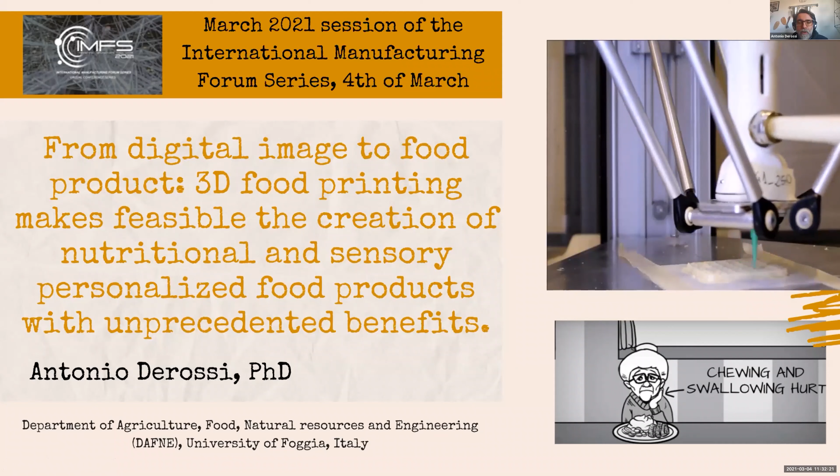For instance, we can see here a classical figure where we can imagine the problem of elderly people. Probably there is a microphone open, sorry. For elderly people, there are a lot of problems with mastication and swallowing. Our question will also be whether it's possible to create something with soft material really able to mitigate this problem.

In general, today my most important points are three: in general, 3D food printing's main characteristics and ambition potential; where we are in terms of the global scenario of our research; and in the last point, I want to share with you some specific results that we obtained in our lab on this topic.

As you well know, additive manufacturing in general, not specifically for food, has three main properties, three main ambitions: digitalization, the possibility to create items from a CAD model, from a digital model.

Decentralization of manufacturing: maybe we are able to create a transition from manufacturing in big firms to directly at home, and also customized product. So it is possible to create structures that meet specific unique requirements for each person.

But when we skip from additive manufacturing in general, we reached really unprecedented success. For instance, I want to show you this paper from MIT, Steven Keating, who with different types of material is able to create very amazing 3D printed structures that are really useful for diagnostic or pre-surgical planning, starting from microtomographic images. So, but what about food?

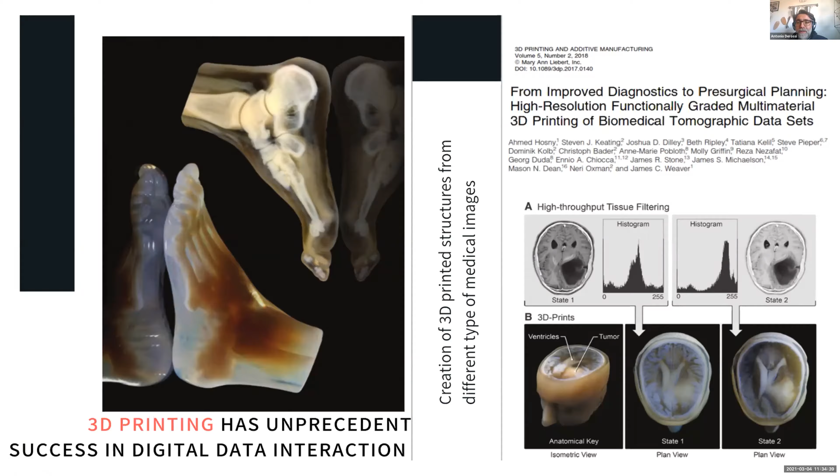In terms of food, the ambitions are more or less the same: the possibility to create new services, new companies, new products, the possibility to create tailored food products, and also the possibility to reduce food waste. One of the most important things is that if in the future we are able to have a 3D printer at home, maybe we'll be able to print just the amount that we want to eat, and not more. Wasting food at home is a very important challenge in these recent years.

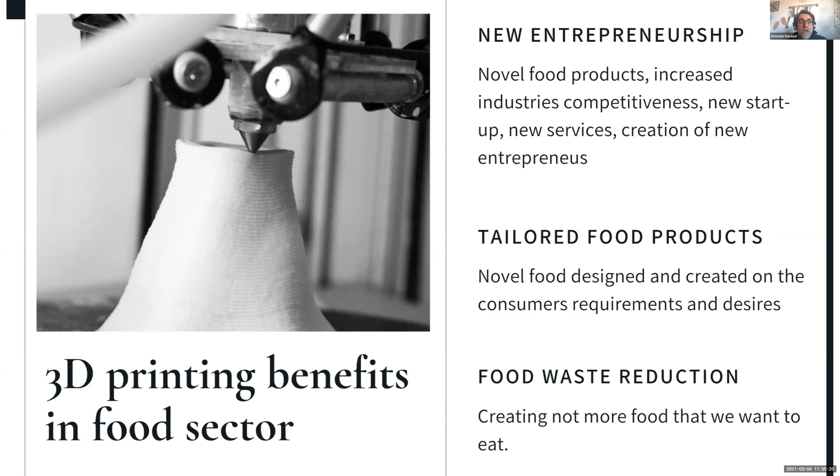But for now, these are used just for specific events. In terms of visual aspect, we are really close to obtaining personalized shape and personalized dimension.

So for 3D food printing, the main steps are: we have to plan the desired food, we have to create a digital model, we have to create a printable food formula - which is not easy to obtain, because as Professor Hashimoto before me clearly explained, it is very hard to obtain specific shear thinning behavior. And it is not easy, for instance, to create a multi-layer material, 10 or 15 layers, while avoiding any possibility of creating a defect in the structure.

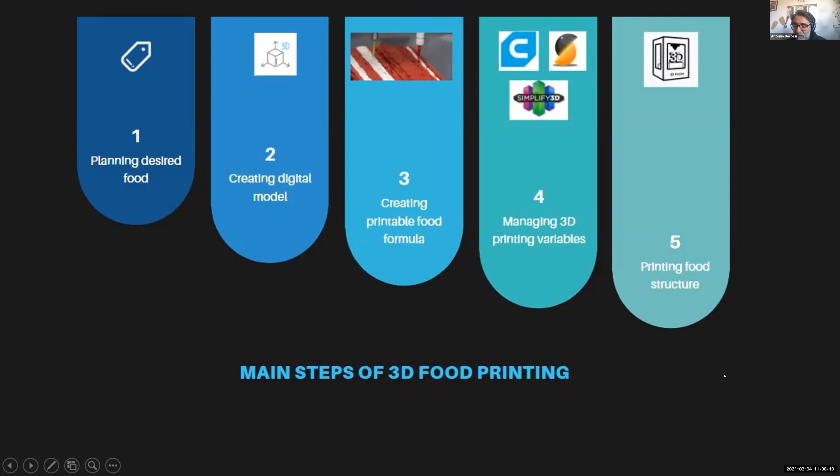PLA, a thermoplastic material, shows a very specific constant rheological property, unlike food. When I want to prepare in the lab, for instance, a printable dough, it is not easy to obtain a rheological property that is fixed every day. So it is not easy to manage printing variables. And then we have to print, and then we have to analyze the printability and the fidelity of printing.

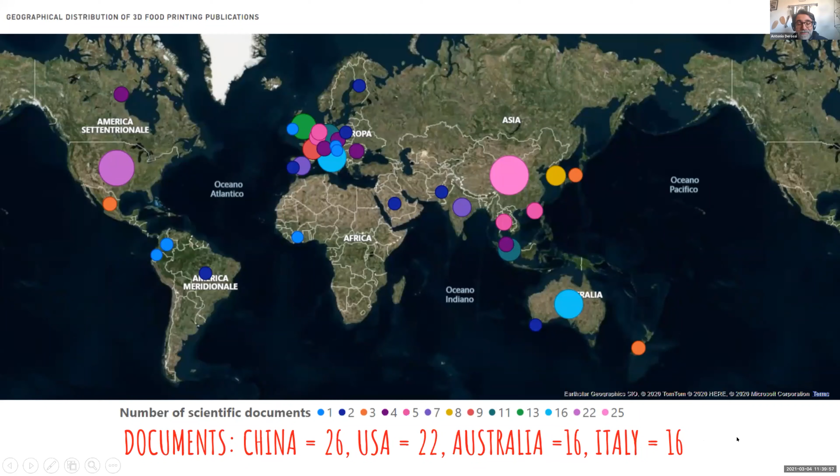So we are in the first steps of 3D food printing, and we need many more years of scientific production to reach the quality of additive manufacturing in general. When we create a geographical map, the most important countries are China, Australia - although in Italy we have more or less 16 papers, these are the most important countries until now that are focusing on 3D printing.

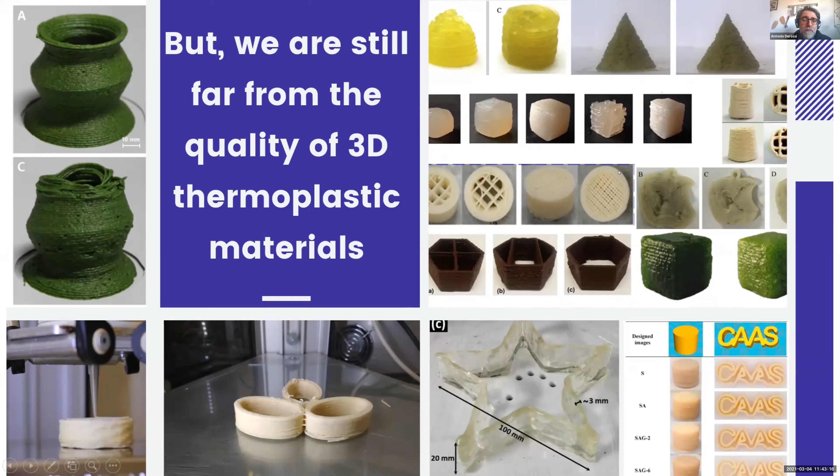These are in general some specific examples, and probably the most important thing is that in 3D food printing, the shapes are more or less simple shapes. We don't really have complex structures that have been printed in comparison to thermoplastic material. In general, the researchers printed easy shapes and easy structures.

But we have to add a lot of information on this point. For instance, we don't have information on the possibility to print at high resolution, lower than 0.6 millimeter nozzle. In general, the majority of publications report a nozzle diameter of 1 millimeter, 1.2, or 0.8. But what about the possibility to create a very thin filament?

We know little in terms of shelf life. It's correct, as the previous colleague, sorry I can't remember the name of the lady, the professor who posed this question, asked: what happens after 3D printing? What about the safety? What about the shelf life?

It's easy to imagine when we print a biscuit that we have to cook, we have to reduce water activity lower than 0.4, 0.5. But what about the possibility to print a mix of vegetable and fruit? We know very little about creating nutritional and sensory customized food products. These are also some very popular examples that I took from different publications.

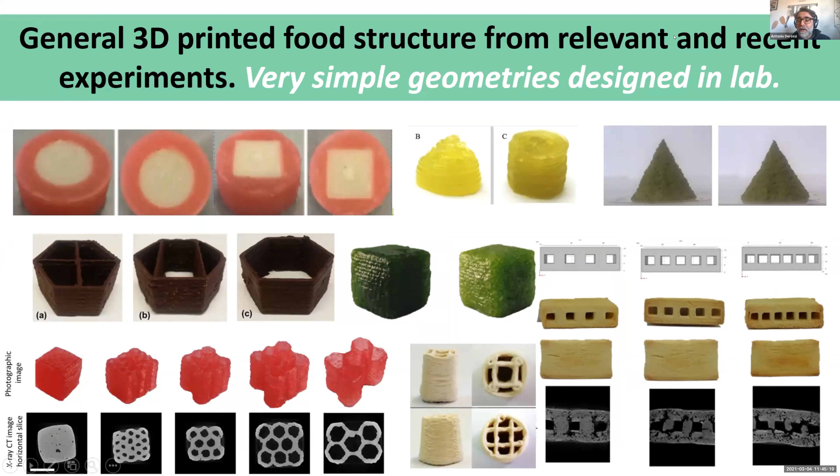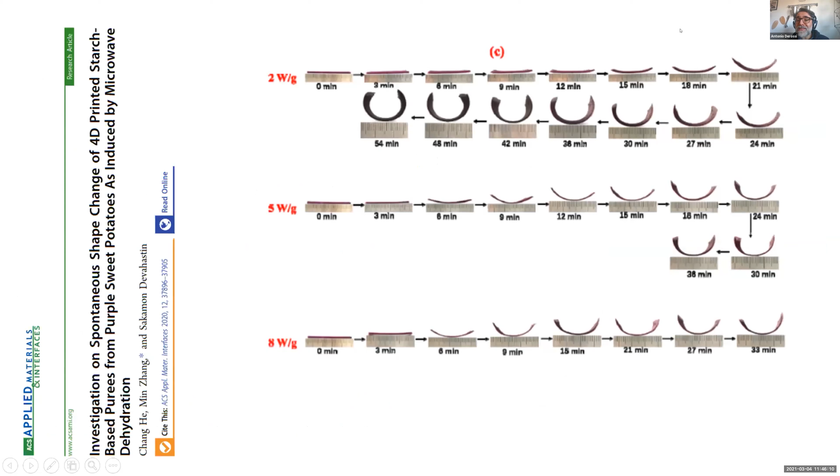Another really interesting point I want to mention was obtained by Parinya. Parinya is a professor in Osaka, and this application is in collaboration with the Massachusetts Institute of Technology. Really interesting in terms of personalization, because I want to show you this short video.

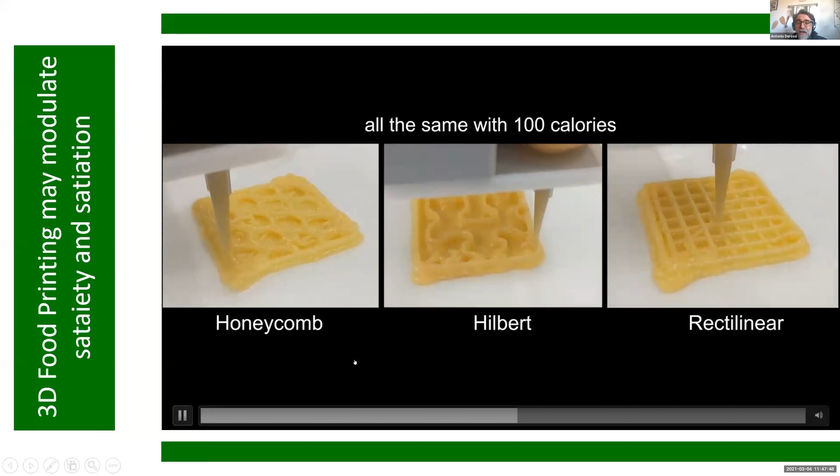If we are able... sorry, okay, what is the main idea? The main idea is that if we are able to program the internal structure, we are also able to create different mastication movements, and this will be able to increase the perception of satiety. So if we are able to plan this, maybe we can help with the daily diet.

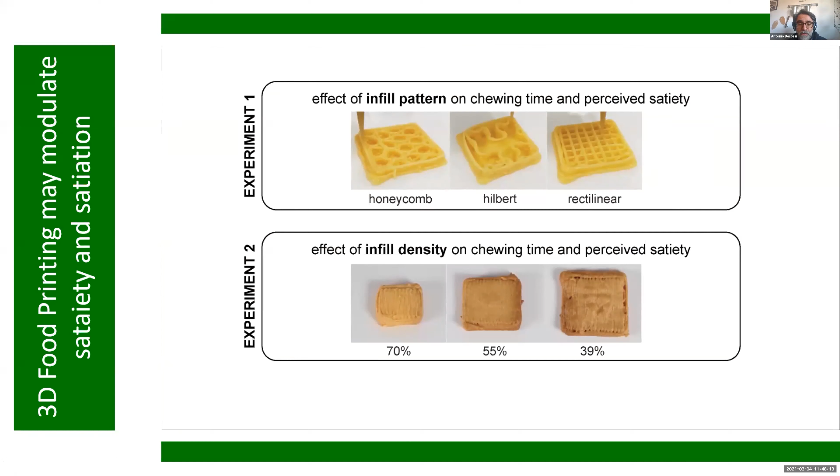It's really interesting because, going back again here, from a specific planning of internal structure, maybe we will be able to induce and create different satiety and satiation perception.

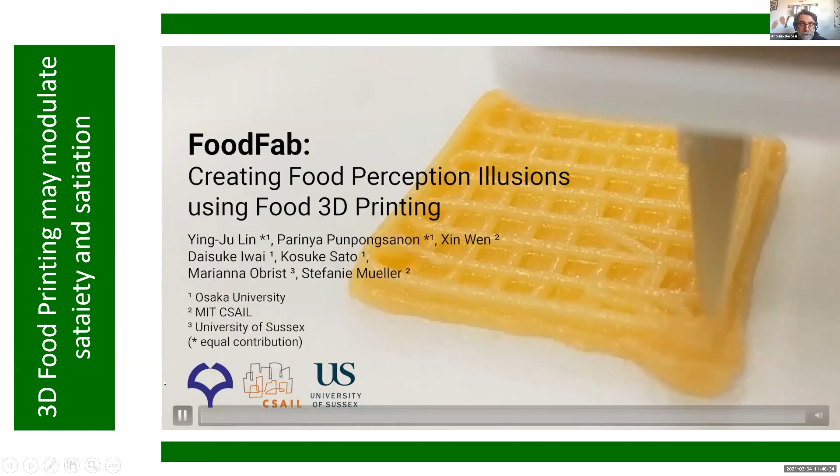Okay, so what about our main progress in this point of view on this specific topic, both in terms of nutritional and sensory property? And what about our main strategy? Our main strategy is...

To think about 3D printing as an assembling property, not a disassembling property. In general, or to use different words, it is an engineering point of view, so we are able to get programmable, customizable nutritional and sensory properties. How do we obtain programmable texture, for instance, or programmable nutritional content?

I want to show you 3 or 4 examples that we worked on in our lab. The first one is this paper. The first idea was: maybe we can plan different CAD models, introducing an increased number of pores inside. This is porosity 18, 22.5, 27, or 2 layers of the same pore with the same dimension.

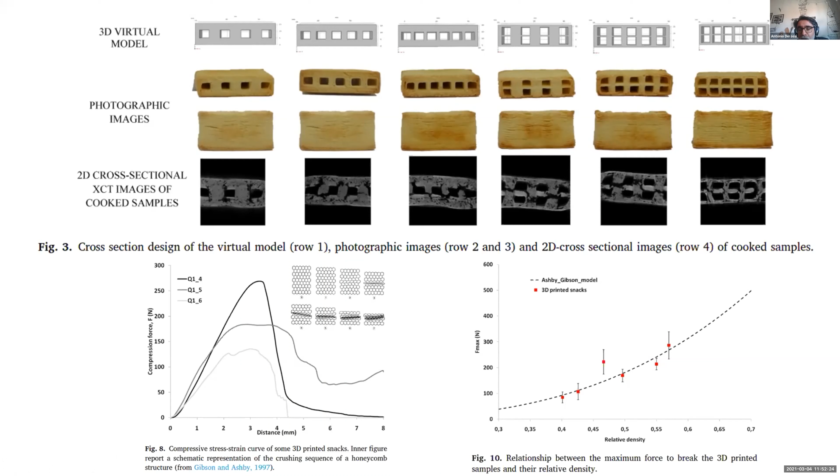This is a second example, based on a different question. We can explore 3D printing to create novel texture properties inspired by plant tissue structure. So it is a point of view like biomimicking, very important for different fields, probably not just food research.

What we did is shown schematically here. From the original tissue, we acquired the microtomographic image, and from this voxel data we extracted just one slice, 512 pixels. Then we rescaled from millimeter to centimeter, and this structure was used to create an STL file. This STL file was used to obtain different models: 2 layer, 4 layer, 6 layer, like crackers with different thickness.

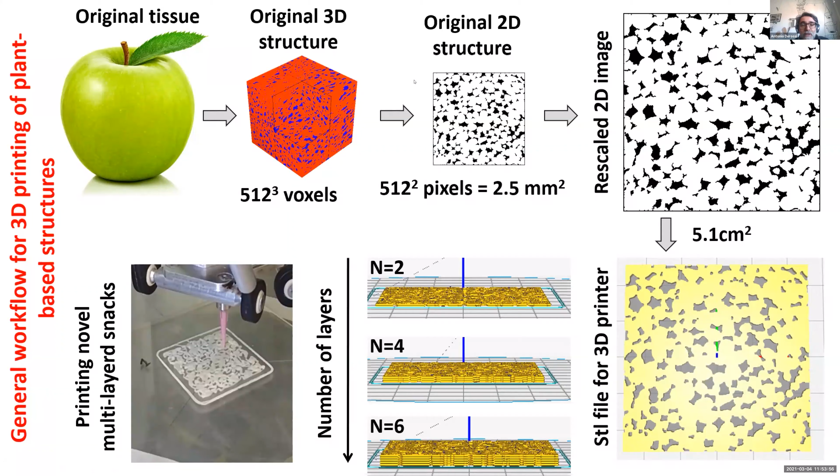And then we started to print to create something new. The second question is whether we will also be able to predict texture. These, in general, are the analyses we performed: microtomographic imaging, texture characterization with a 3-point bend test, and we also used the popular finite element method to simulate stress distribution on the different snacks.

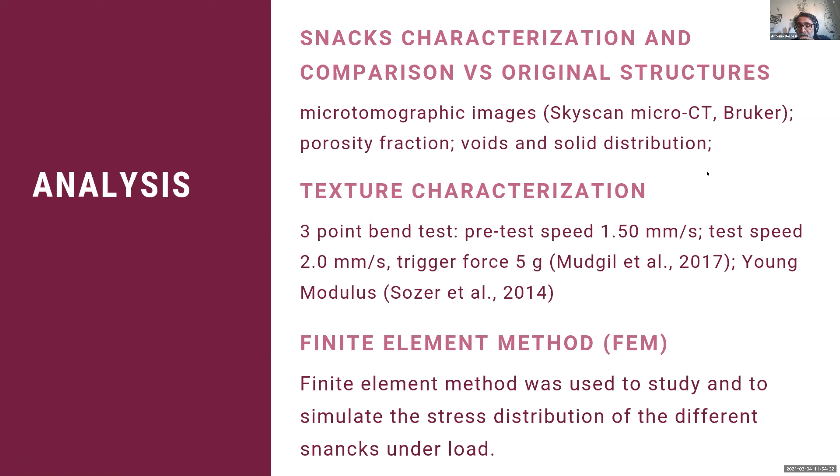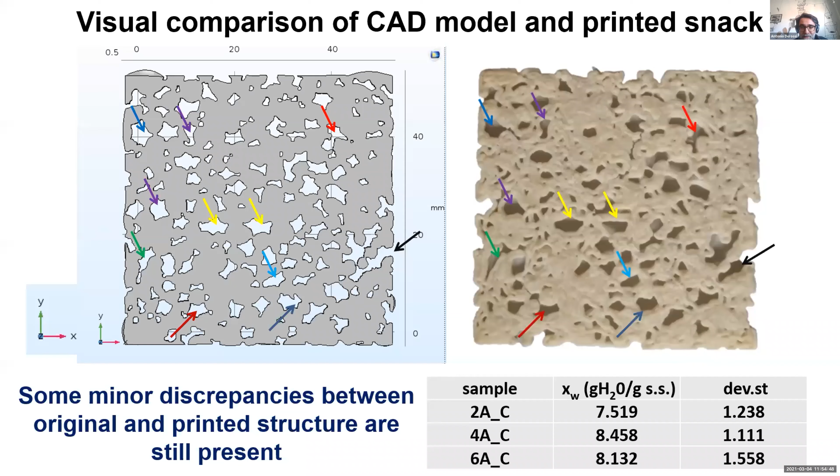Then after cooking in the oven at 180 degrees, obviously we obtained a really impressive increase in porosity, because during cooking in an ordinary oven and during dehydration, what we obtain is the formation, the creation of different new pores and new fractures.

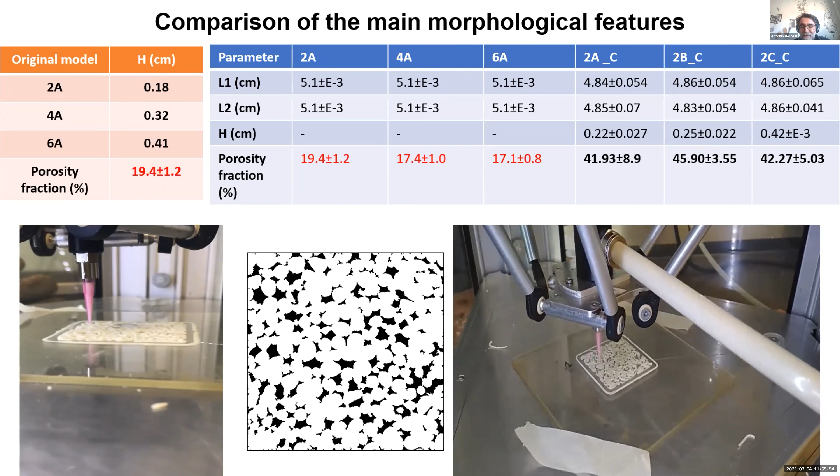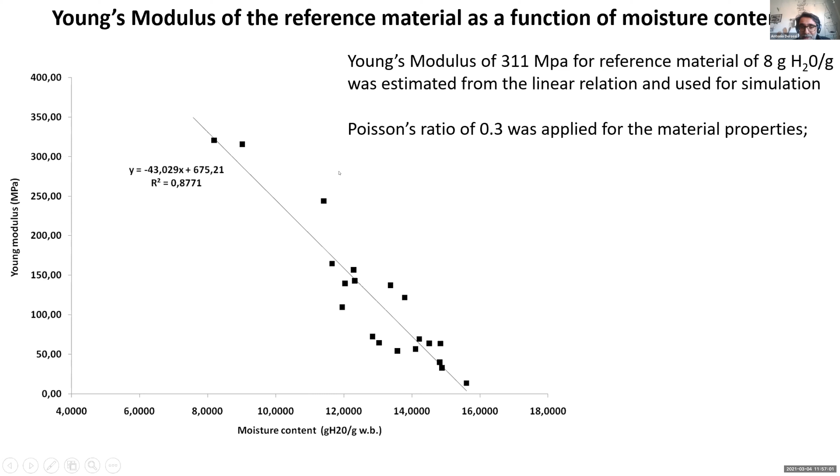And we used the Young modulus of a reference material with no void inside, absolutely completely filled crackers. And then we modeled this with our FEM methods.

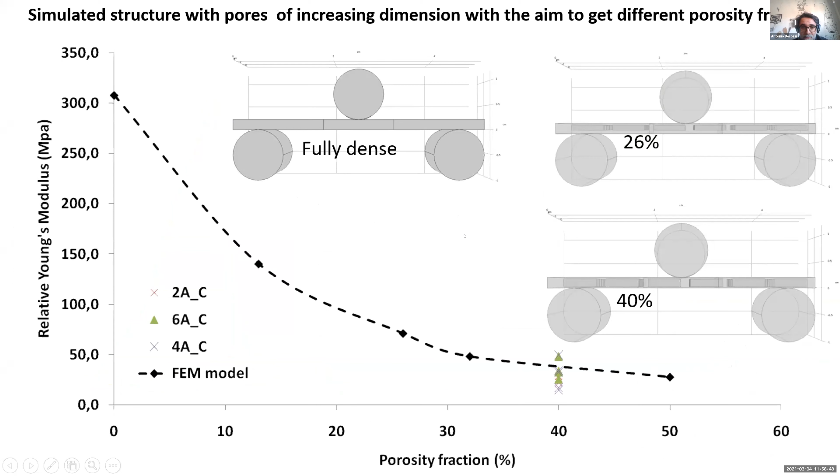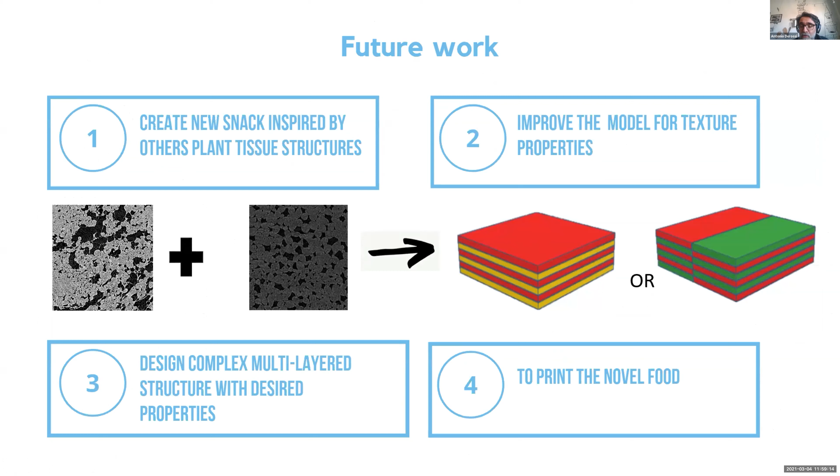For instance, this is a possibility if I want to start with a different plant tissue image. If I remember well, this is eggplant, and these are apple. Maybe we can create a multi-property material to obtain unprecedented, really new texture traits, texture properties.

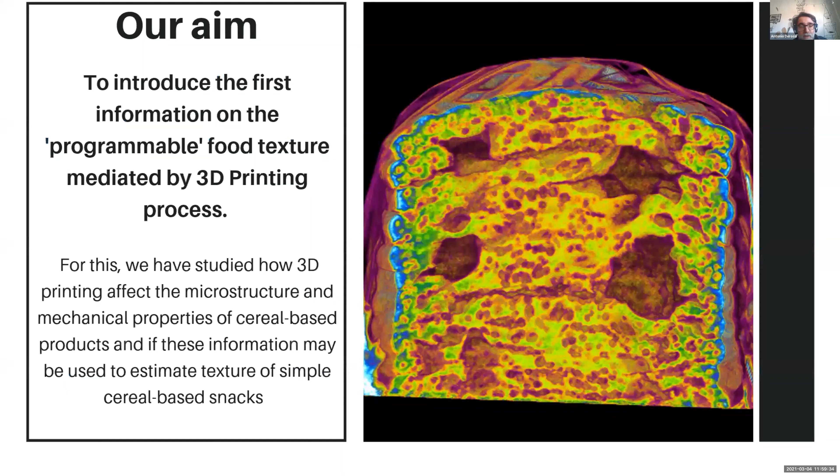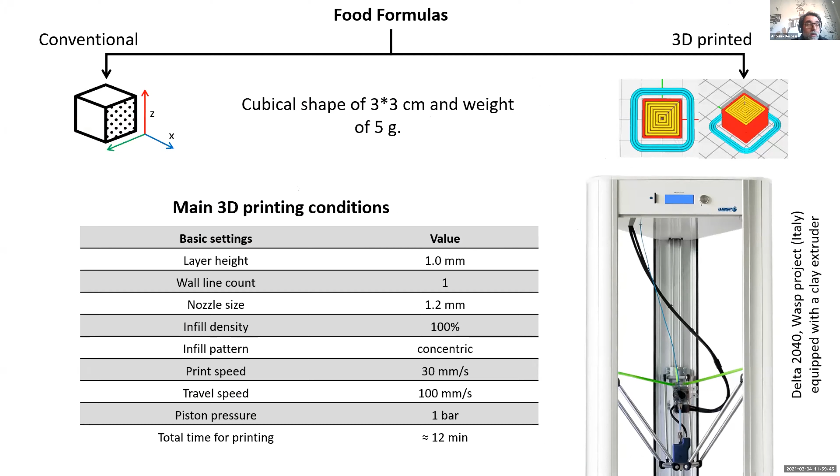So again, what about the effect of microstructure? Because when we print, another important question is what's happening in terms of microstructure. To understand and introduce novel information, I want to skip a couple of slides because I can see it's 1 p.m.

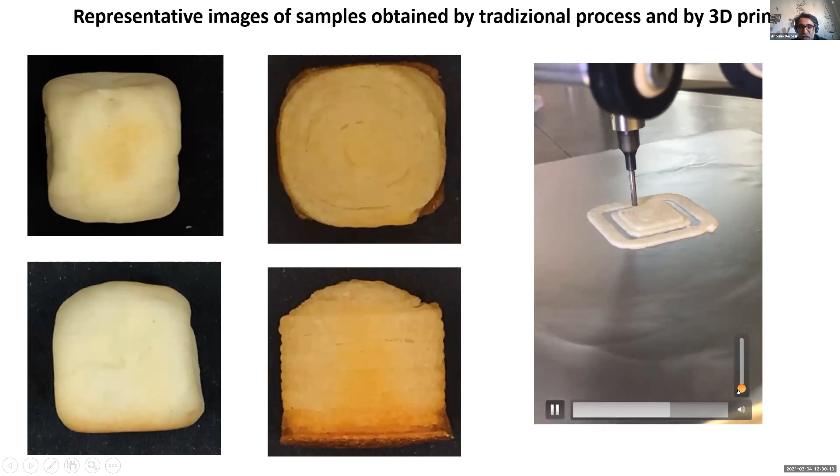What we did: we prepared, by conventional technology, some snacks, and these are the 3D printed ones, and we analyzed them in terms of microstructure. This is the printing experiment. It is completely different, because during the movement we left some void, some fracture inside. Also inside the filament, we have a porosity distribution that is completely different.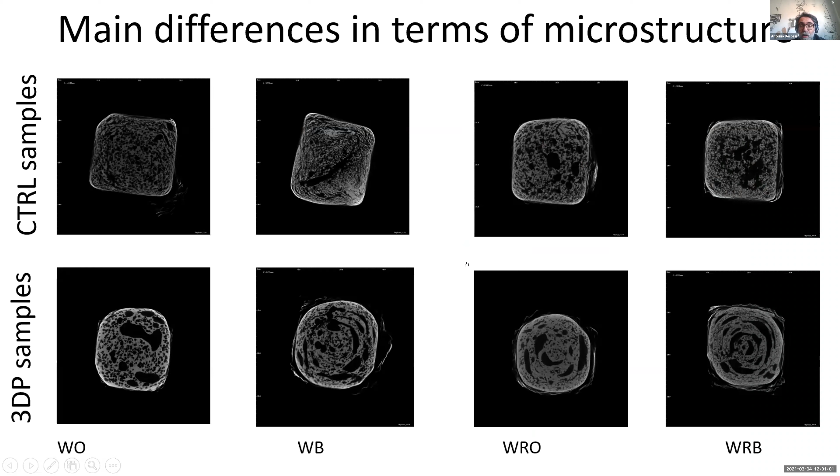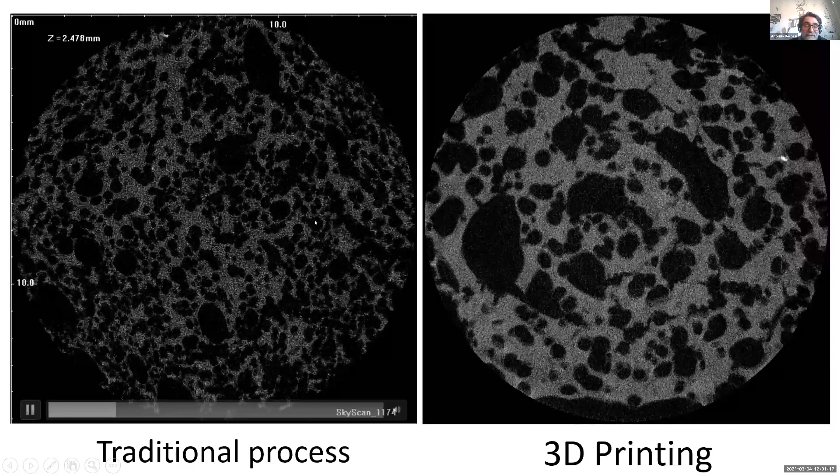I want to show you the differences in microstructure. We have a very big pore here, a very small pore here. So 3D printing also has a significant effect on the microstructure and on the number of pores. The 3D printed sample shows fewer pores in number, but bigger in shape and dimension.

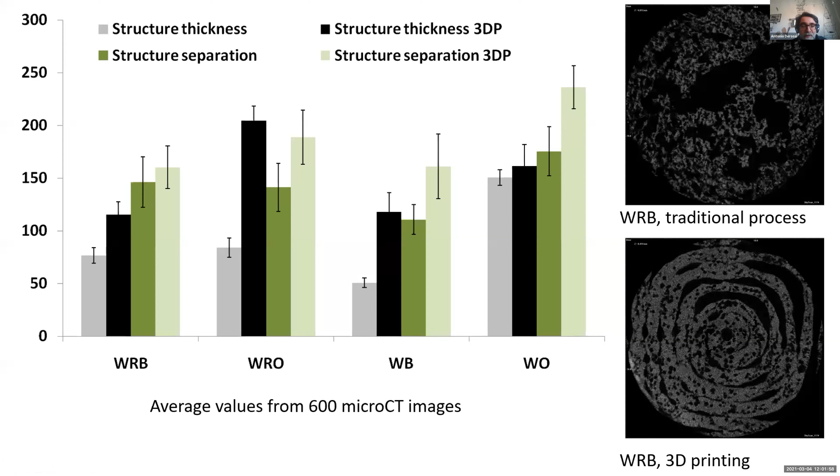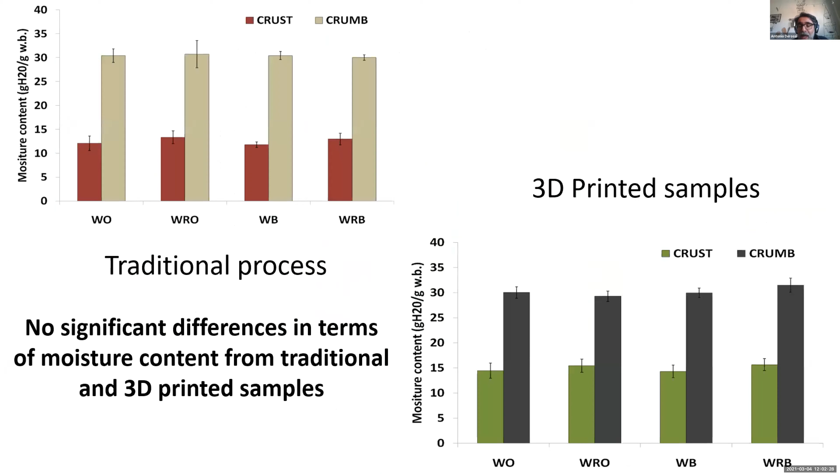The last example was to take one part of this microstructure image and try to model this by COMSOL, by finite element method. We can see that experimental stress was, in a very small portion of the 3D printed snack, about 2.23, and we obtained an estimated stress of 2.45. So we can also use the microstructure image, which captures specifically what happened inside the filament, to obtain better validation and a better estimation of texture property.

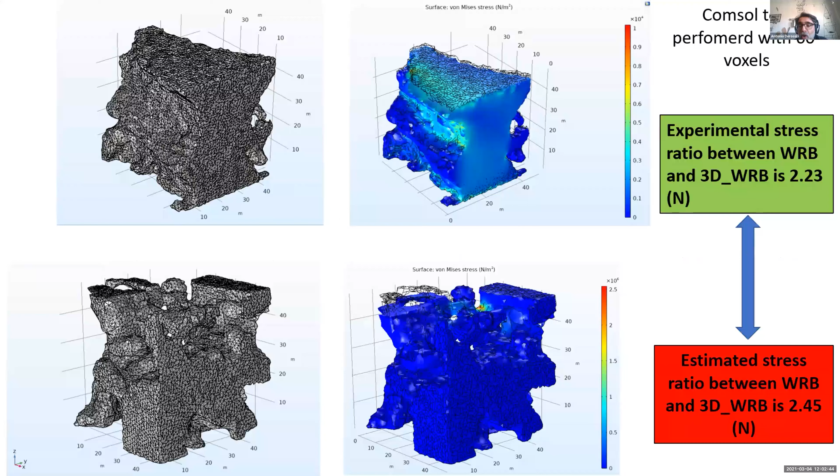That means, with this approach, we will be able to create a soft structure for elderly people or a hard structure for young people, for different aims — commercial aims, or for hospitalized patients. Finally, I want to remind you of probably one of our first examples, our paper on the possibility to create a nutritional personalizer.

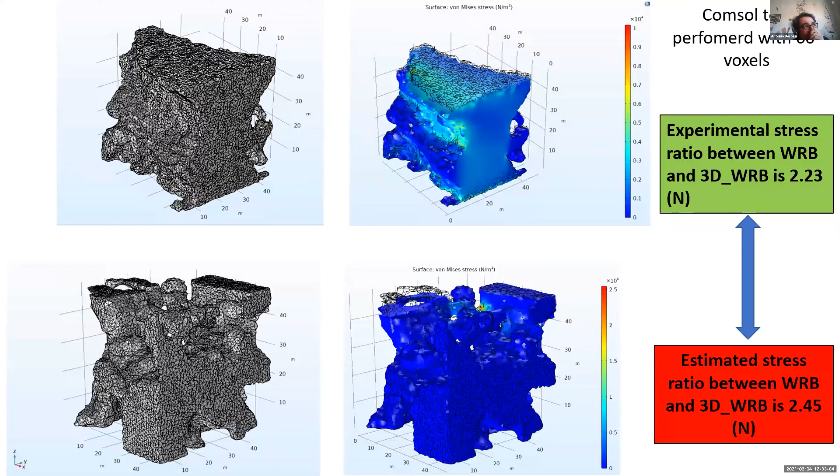We started with the energy and micronutrient requirements for children between 3 and 10 years old, and we planned the printable food formula to satisfy the recommended daily intake for a snack, which in general is reported to be between 5 and 10% of the total RDA. We also based it on banana, because children in general really appreciate banana.

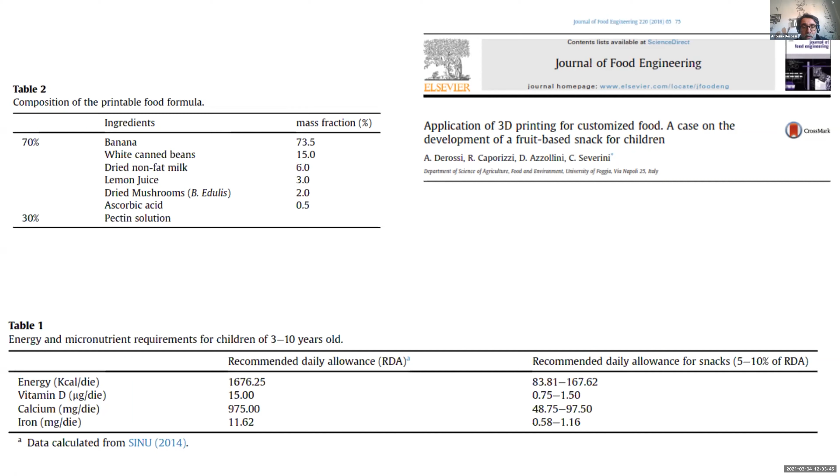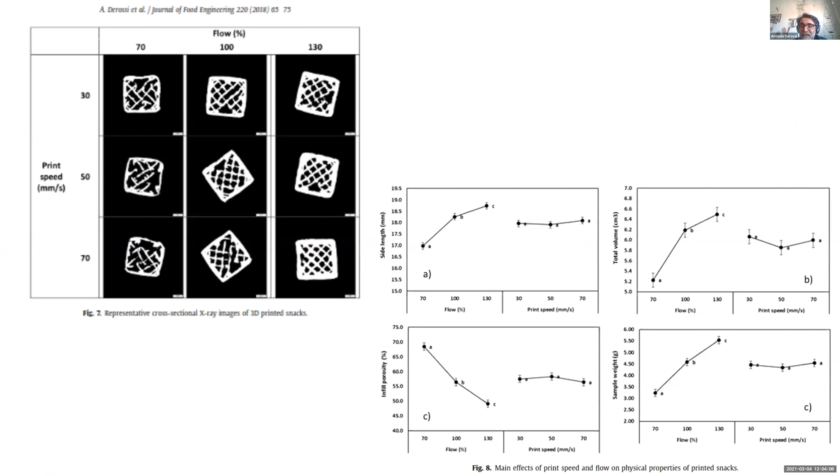In conclusion, our recent efforts over the last two years have focused on the possibility of creating personalized food using 3D food printing. Yes, it is possible to create programmable food texture, controlling shape, dimension, and also void generation. It is not easy — we need further experiments — but it is a really interesting and important hot point for this technology.

Also, it is possible to plan the composition of the ingredients used to create a complex food formula to obtain nutritionally personalized food. Further experiments will allow us to alleviate or mitigate mastication and swallowing problems, or create novel texture perceptions, pushing forward from a commercial point of view.

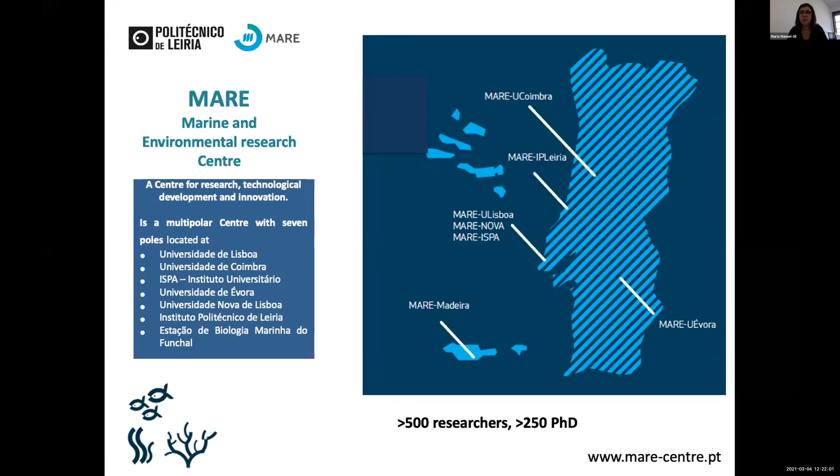It's a national research center with more than 500 researchers, and we are organized in poles in Portugal. We are seven poles: one pole at University of Coimbra, one pole at University of Évora, another three poles in Lisbon, University of Lisbon, New University of Lisbon, and ISPA, and another pole in Madeira Island, and the last one, the pole of Polytechnic of Leiria, whose headquarters are here in Peniche, near the sea. We are the only infrastructure dedicated to marine science in the west zone of Portugal.

And just let me show you our facilities, which are the headquarters of the pole of Polytechnic of Leiria.

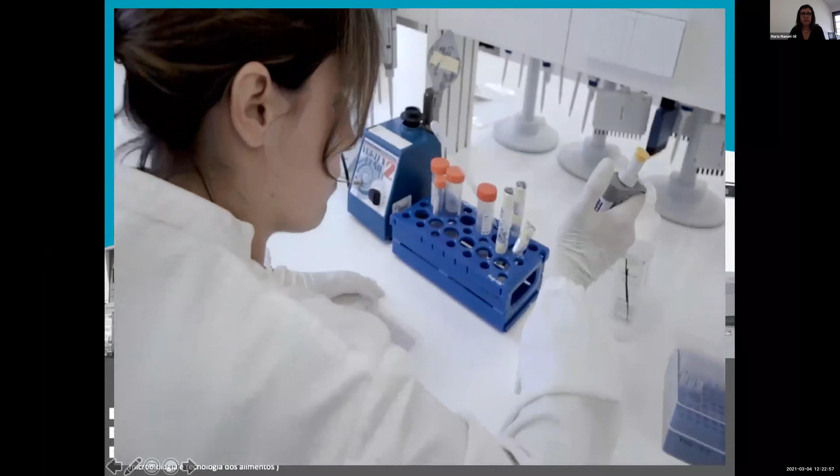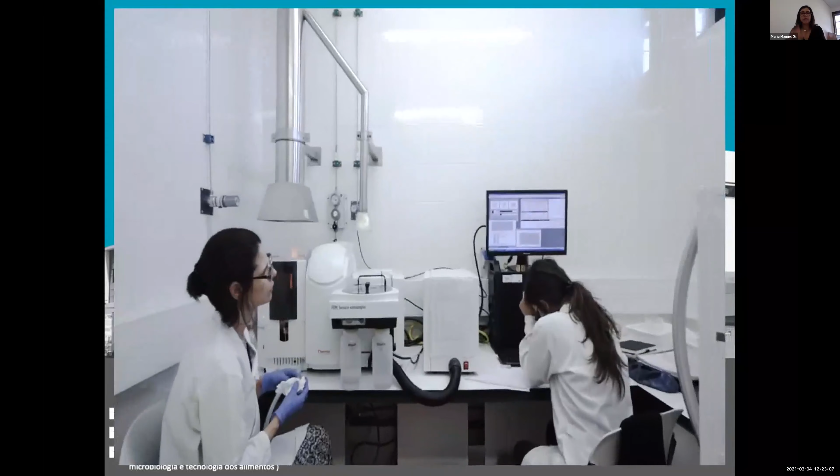Okay, sorry about that, I don't know what happened.

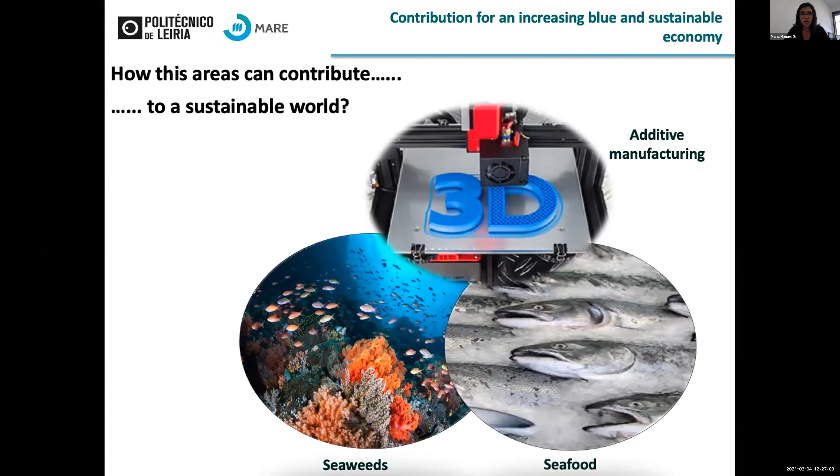Today my presentation will focus on marine resources, trying to open a new door related to additive manufacturing, and trying to see how marine resources can be a potential biomass for the 3D printing industry, and how we can work together to find solutions for a more sustainable world.

As we all know, the population is growing, and we need more food, but we need healthy foods because we currently have a lot of nutrition issues. We also need new foods to prevent hunger, as the global demand for food is expected to double by 2050. So there are lots of issues related to food nutrition, but also to food security.

We know seafood is a food resource which is one of the most important food commodities consumed in Europe, particularly in Portugal. It is very rich in nutrients like proteins, omega-3s, minerals and vitamins, and is socially, economically and environmentally sustainable, actually more or less.

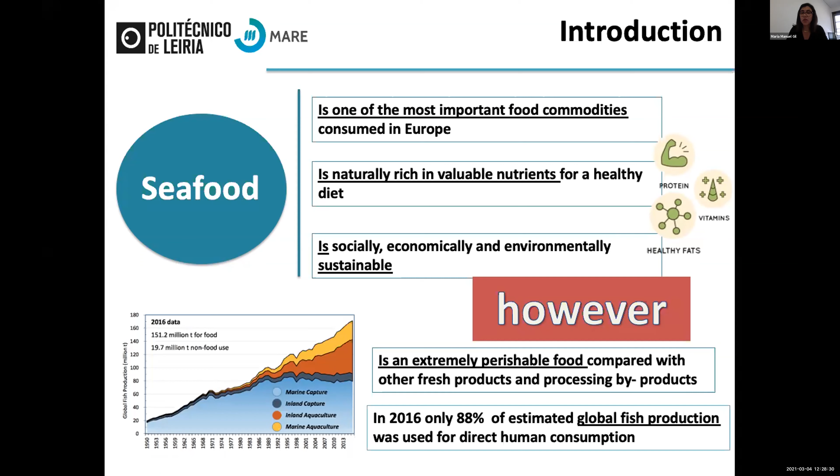But this type of food is very perishable compared to other products, and only less than 90% of global fish production is actually used for direct human consumption. The remaining is non-food products, discards, or bycatch that are not used, and they are very rich in high-quality proteins of high biological value, polyunsaturated fatty acids, vitamins, minerals, and essential amino acids, which have a positive effect on human health.

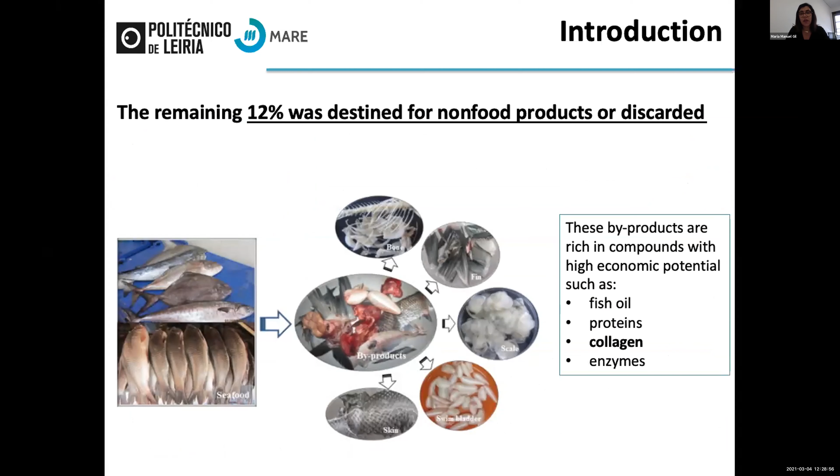Also, in September 2015, the Agenda for Sustainable Development was adopted, including 17 sustainable development goals. It's easy to see that food production involves many of those goals. So we can ask: how can marine resources contribute to reducing the environmental footprint, increasing sustainability, increasing food security, and developing new types of food?

It is vital to start using aquatic-derived biowastes as a possible feedstock for the production of value-added chemicals or materials, as a sustainable alternative compared to the exploitation of more conventional food resources, using a circular economy approach, and trying to reduce waste, which is very important nowadays.

So 3 topics must be considered. We need to be much more responsible in our consumption, trying to find zero waste, not only in food but in all areas. We need to be more sustainable in our food choices and food products, trying to use unexploited products — in this case, unexploited fish, but also looking for other marine resources. And of course, we need to guarantee food security. Here we can look for non-traditional foods and try to combine them with emerging technologies, just like additive manufacturing.

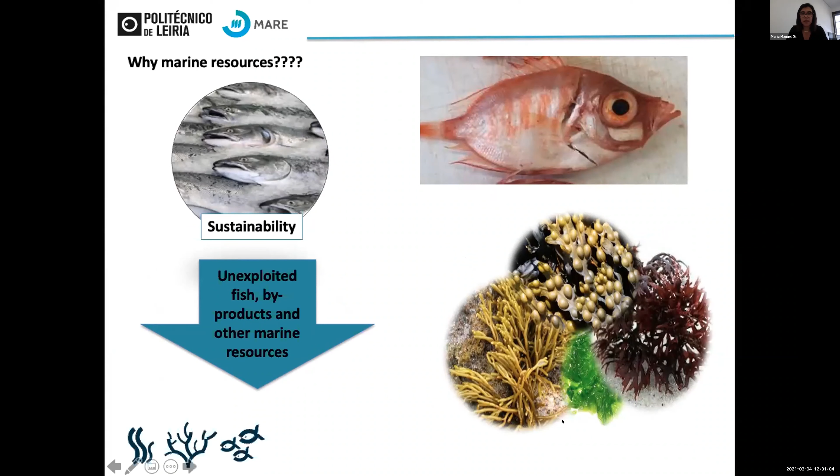So why marine food resources, and why open this new door as a biomass to be used combined with additive manufacturing? First of all, our biological resources are limited and we need to feed people. On the other hand, we are very traditional or conservative regarding seafood consumption, so we are fully exploiting a lot of marine species, but there are many others that are underexploited.

There is a growing need for nutritional and healthy food, and this increases the demand for fishery products from marine resources, but productivity is already highly stressed by excessive fishing pressure, as well as the increase of organic pollution and toxic contamination related to climate change. So we need to change the way we consume fish, change the way we look at marine resources — we'll discuss this later — and we need to be non-traditional in our food choices.

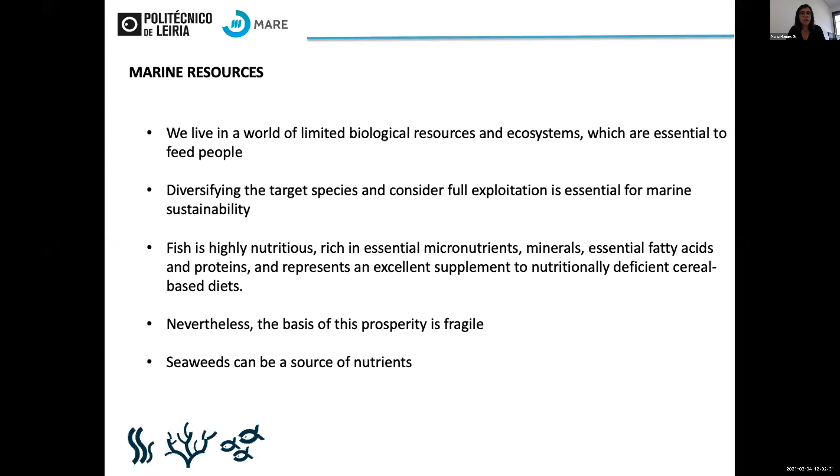On the other hand, seaweeds are also marine resources and can be a good source of nutrients. We know we have a lot of water on our earth, and there's a lot of marine biodiversity related to seaweeds, but nowadays they are not very consumed, even though they are rich in nutrients.

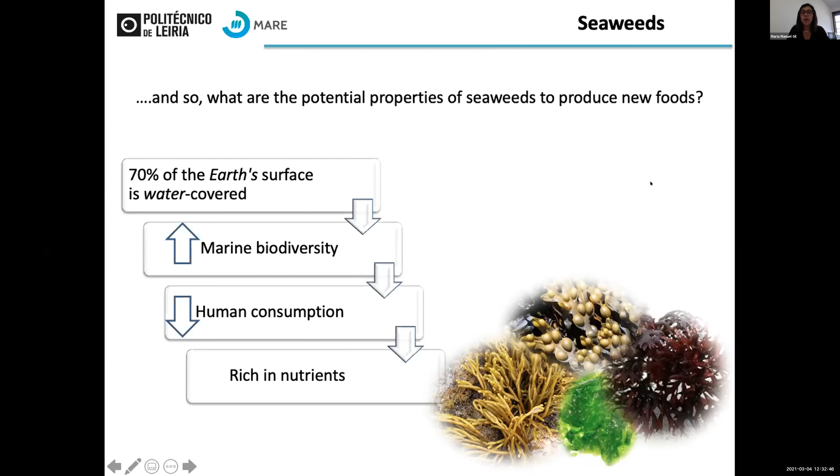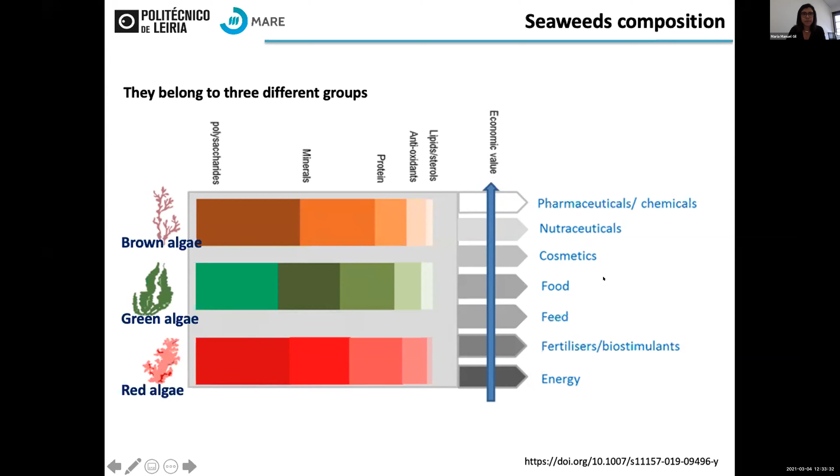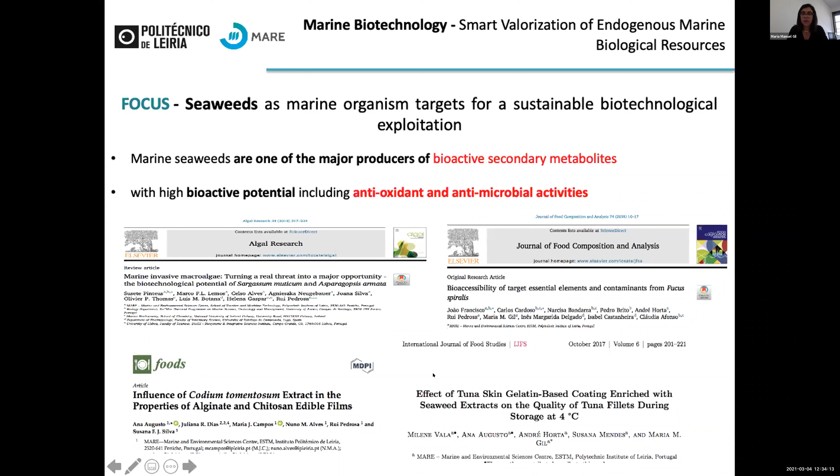We have been looking here in our research group at seaweeds as a marine organism that produces a lot of bioactive compounds, so it has a lot of interest to be introduced in the food chain to develop fortified or functional foods. Those bioactive compounds include antioxidants and antimicrobial activities, but there are a lot of other bioactive compounds present in the seaweeds.

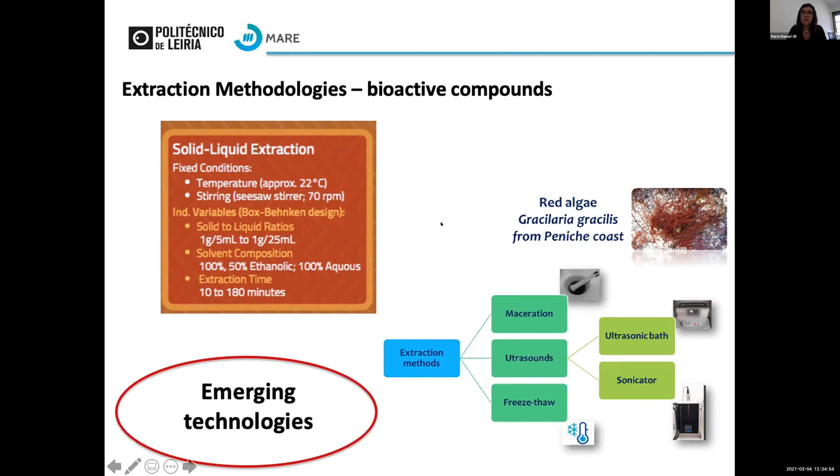Depending on the extraction methodologies, the type of seaweeds, and even the type of aquaculture production—whether they come from the sea or are produced in an aquaculture system—we can find different bioactive compounds. Nowadays there are a lot of emerging technologies that can be used to increase the yield of extractions, from an economic point of view, and different compounds have been obtained with different technologies.

We can look at different extraction methods here. We obtain different compounds, and also we obtain different colors, so it's very easy to see that we are extracting different compounds with different colors.

We know that a lot of seaweeds are edible. We still need some regulation here, but they have high commercial value, they are easy to produce on a macro scale, and they have a lot of bioactive compounds, as well as polysaccharides and hydrocolloids.

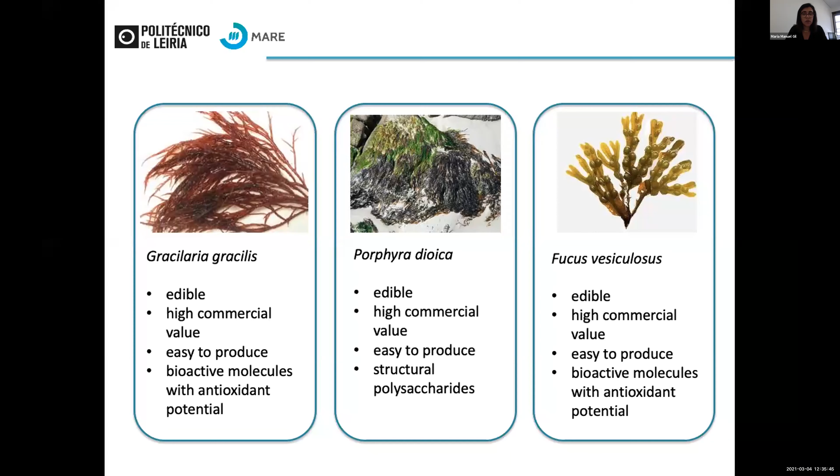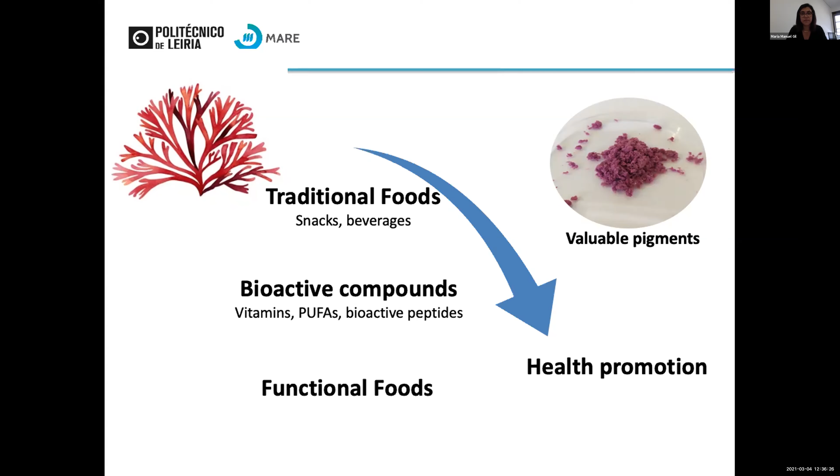So seaweeds can be an important biomass to be linked with traditional foods, incorporated into traditional foods, and used to develop functional or fortified foods to help promote healthy diets. They can also be used as a valuable pigment, which is also related to a problem we looked at with 3D printing technology, mainly with the extraction process. So we have here an opportunity and the need to develop functional food.

There are lots of people now looking for healthy foods and healthy diets, but also people are going to some limited diets, just as an example, vegetarian diets. Some microalgae are already used as nutritional supplements—not seaweeds, macroalgae, but microalgae.

However, using those micro or macroalgae in food for consumption may have certain disadvantages, such as off-flavors. They are not very easy to consume, depending on the people, since the flavor is different from what we are used to. They also have an early loss of compounds by functionality, so it's very difficult to produce functional foods with seaweeds and microalgae and introduce them into the consumer's diet.

So we have an opportunity, and one of the key challenges is to use emergent technologies that help with the introduction of non-traditional foods into diets, tailoring foods for nutritional needs depending on the physical or medical condition or even life stage.

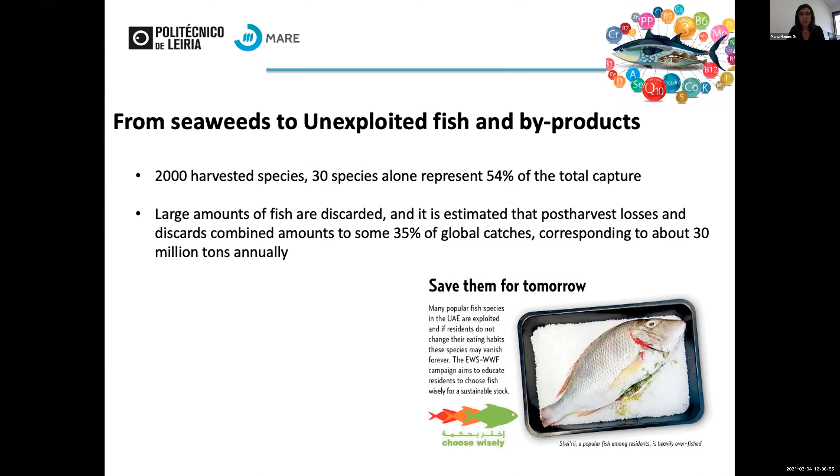We have been working here looking for unexploited fish sources. People normally resist new seafood species, so we can try to find new ways to introduce those species which are nutritionally interesting and rich, and we need to work more based on a perspective of circular economy and try to innovate, promoting healthy marine food products using those emerging technologies.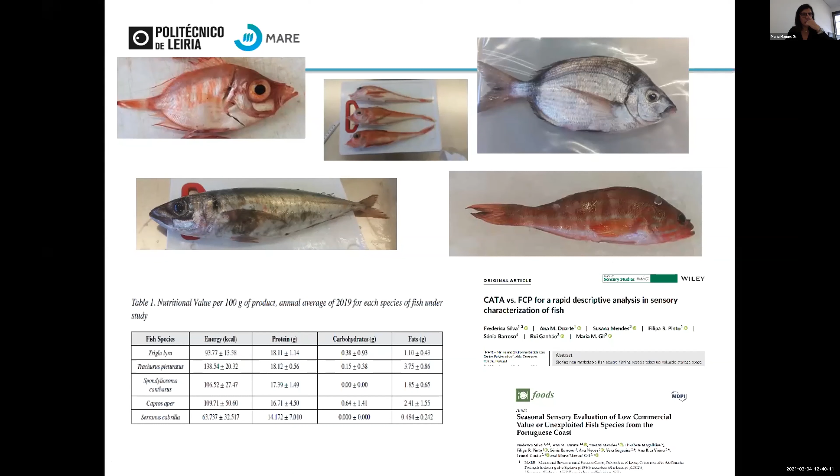These are 5 examples of unexploited Portuguese fish: lira, carapau negrão, minissaia—some of the names in Portuguese—which are not consumed here by Portuguese people, and they are organoleptically interesting and also rich in several nutrients. So they can also be a good source to be used with emerging technology to innovate in the food sector.

Therefore, research and development to promote undervalued seafood consumption, reformulation of food products to meet consumer nutritional needs, and encouraging greater waste use of seafood processing industries while decreasing its environmental footprint is of course very important, and it's of utmost importance to the earth and the world.

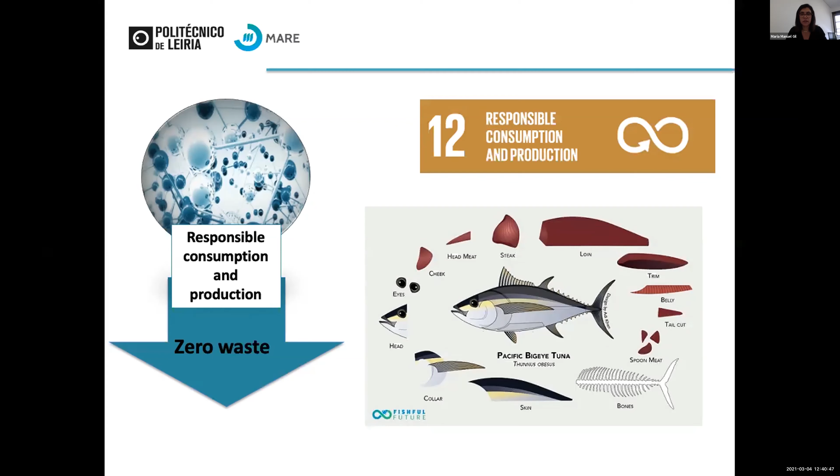So we need to innovate to combat food waste and to ensure food security.

If we search for 3D printed food on the internet, we'll find a lot of information. In recent years, numerous studies have demonstrated the value of this technology. However, these studies generate a lot of new challenges, as food materials consist of many different components with different properties, and they should be studied so we can increase the number of food materials that can be used with this technology.

3D food printing has mostly been used to produce sweet foods and not healthy foods, but we need to look into this technology, as Antonio already said, to increase the nutritional and sensorial properties of these products. Hence, as already highlighted by Antonio, we are starting research in this topic.

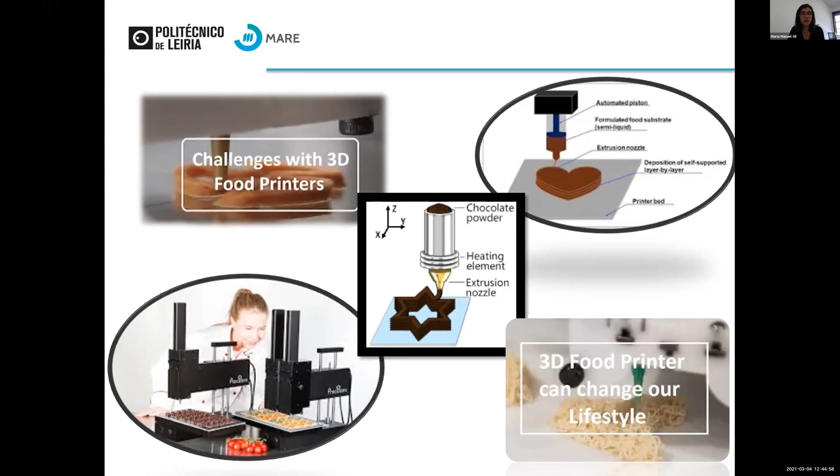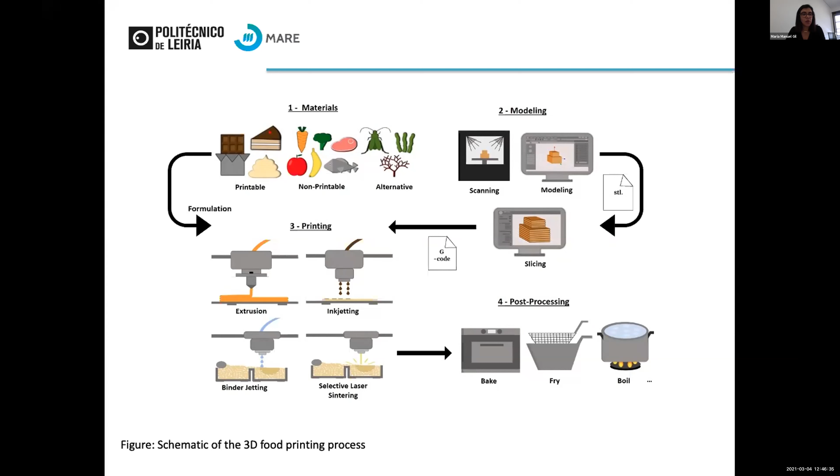But then we need to look at and study the post-processing, because post-processing will also influence the nutritional value and shelf life of the product. So we need to look at the whole process from a global perspective. Among the referred advantages, of course, there are also a lot of limitations and challenges.

These types of products are not popular among consumers. Consumers don't have an idea, and it's not very easy to introduce this type of product, even though this is a potential technology to use the co-products or byproducts of the food processing industry, which is very important nowadays.

So those products, being a promising source of valuable substances that possess nutritional properties, are visually unpleasant for consumption, but can be used as printable formulations following the principles of a circular economy, designing out waste and contributing to the sustainability of the ocean and even of the land.

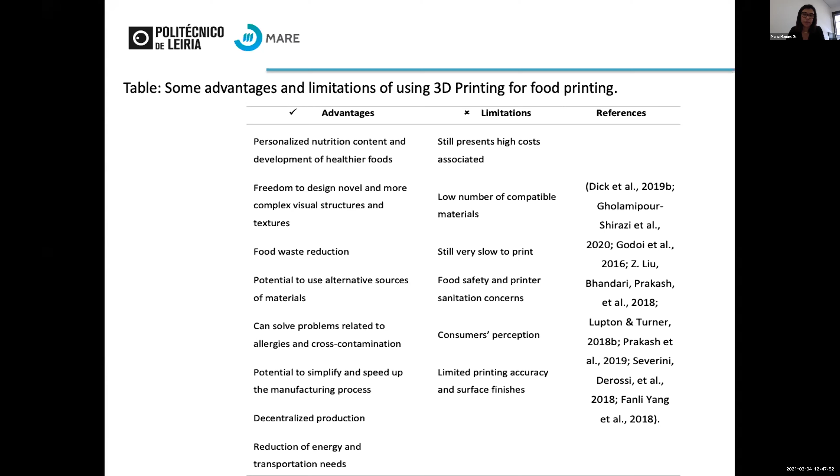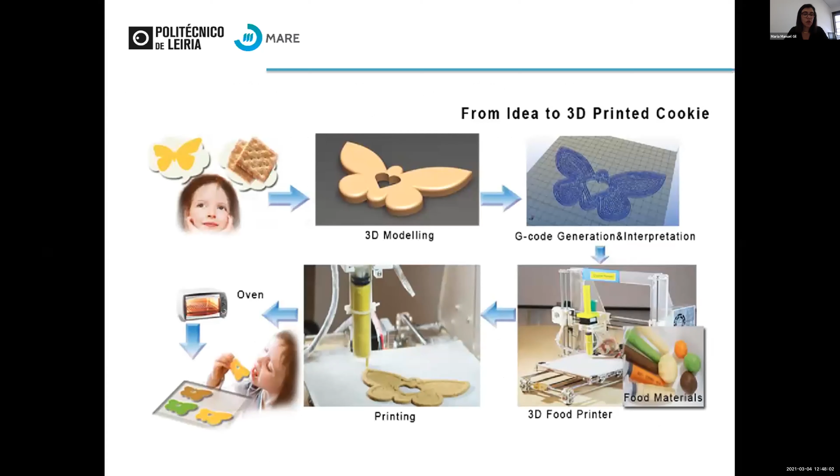To date, the use of 3D printing for food has been mostly used for the production of aesthetic shapes for chocolate or pasta products. But the potential should be seen in a different way, in which food can be tailored to individual needs, incorporating required nutrients while retaining the requirements to be visually pleasing. In addition, it will be possible to guarantee all the organoleptic characteristics the consumer is generally familiar with, such as smell, sound, and texture.

But there's a lot of challenge presently. Despite the many recent advances in 3D food printing, there's still a lot of work to do to find more printable ingredients.

The process is very slow for mass production, as Lorenzo and Antonio already discussed. This is a key point, and we need to work on consumer perception. Incorporating cooking technologies should be an advantage and a good point to increase mass production, as well as shelf life and the way people can use this technology to produce foods.

On the other hand, we were talking about the bioactive compounds we can obtain from seaweeds, but there is also a problem related to how we can incorporate these bioactives to develop fortified foods without losing functionality. This technology must be combined with others like microencapsulation or electrospinning to help include those bioactives from marine resources and maintain functionality. Otherwise, this is not a functional or fortified food to help restrictive diets.

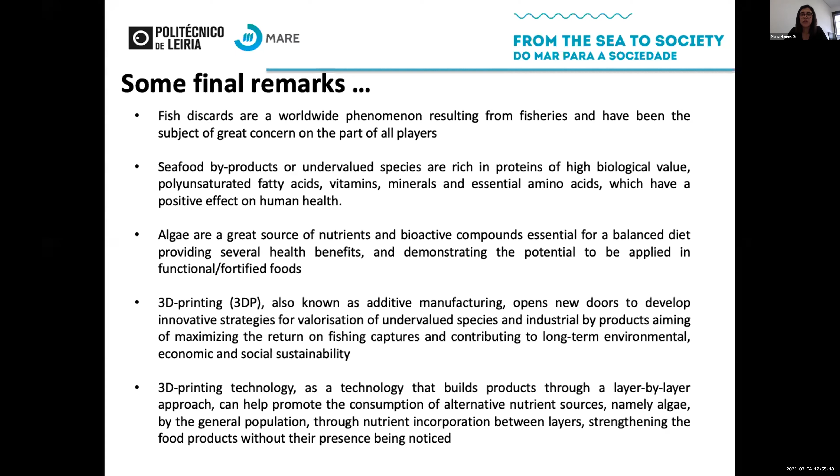Let me finish with the role of science, in my point of view. We need to innovate, we need to discover, but we also need to communicate and share, and join expertise to increase knowledge and go one step ahead, but also to unite the people of the world and find ways to guarantee food security, but also the sustainability of our world. Thank you very much for the opportunity.

And if you have any questions.

Thank you very much for a fascinating insight into the marine world.